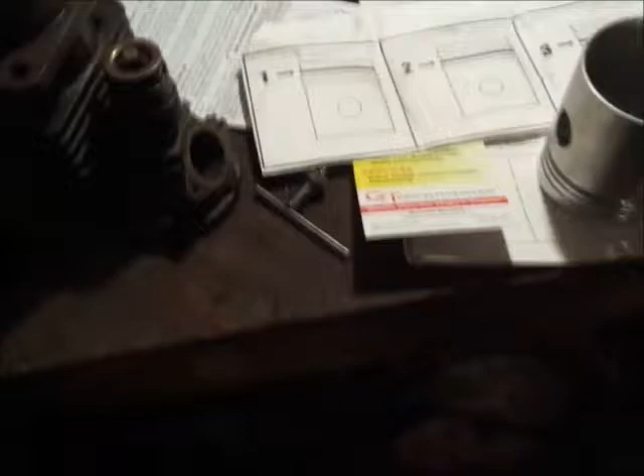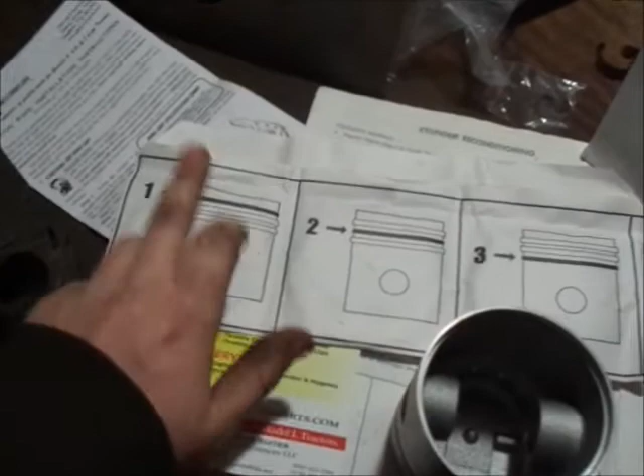One thing I will say here while the heater's running and getting warmed up is GT Gravely Parts really has done good here with showing you the first, second, and third oil ring. They also give you handy dandy instructions on how to gap them and everything here, so if you guys get them, you should be able to follow the instructions pretty easy.

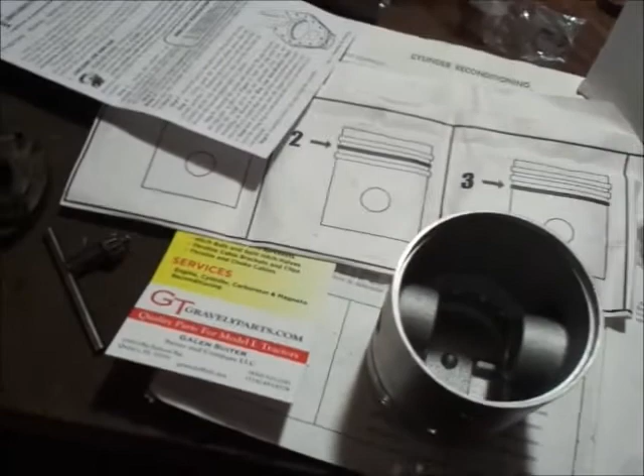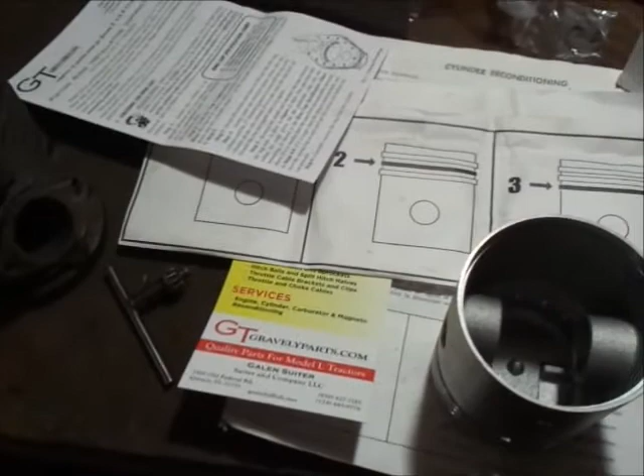I'll show you me putting them in here. I have measured them, and the gaps are all about 4 thousandths out of spec on every single ring above. So what I'm going to do is just slap this 20 over in it, because the 25, I went back and checked it again, and everything on that is way too tight. The piston to skirt clearance is bad. So I'm going to put this in here and run it, and like I said before, what's the worst thing that happens? It smokes. So here we go.

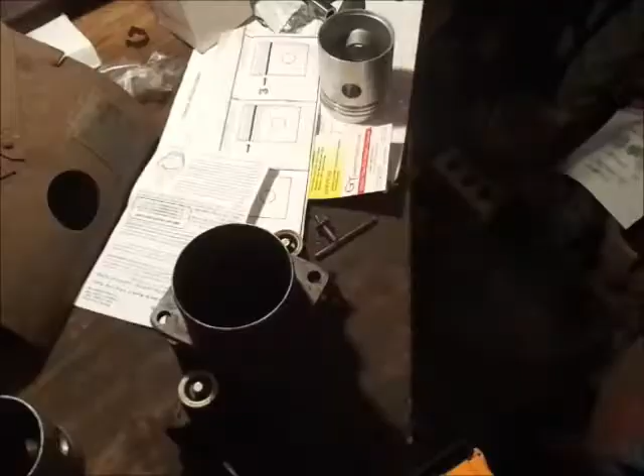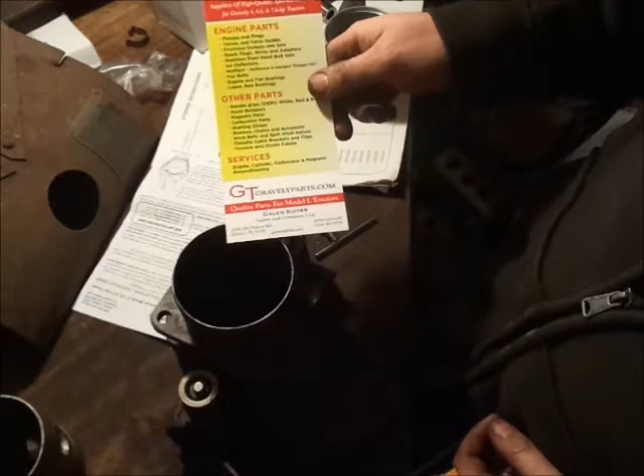Alrighty guys, so we got the piston here and the rings here from GTGravelyParts.com. If you guys are hunting for anything, piston rings, piston, anything along those lines, these are the guys to get it from, and everything you order comes with one of these cards, so remember that.

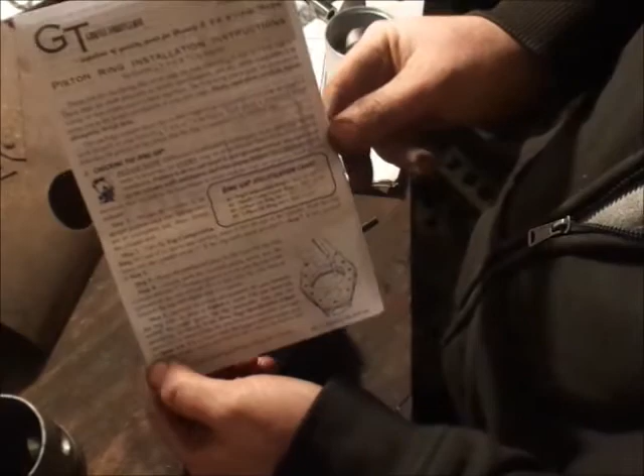So we're going to move into the rings here, which they have supplied the paper and given us all the numbers and everything. I believe I'm in frame. There we go, for sure. Hopefully you guys will be able to read this. I'm trying to read this through the camera, but I don't know if I can.

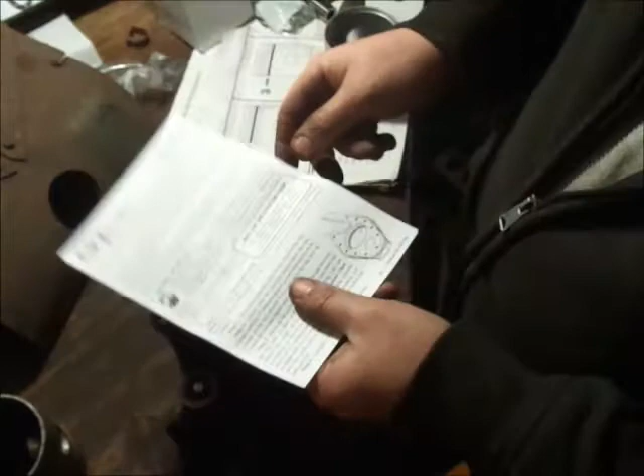Top compression ring should be 12 to 20. Middle compression ring, or second ring, 8 to 16. And the 3-piece oil ring set should be 015 to 55, and the one piece should be 08 to 016.

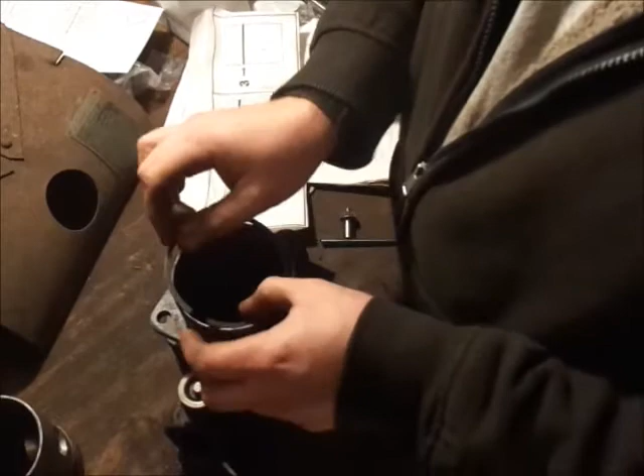So, with all that being said, hopefully you guys saw the clip, whether I'll stick it in the beginning or the end. Let me see if I can get the rings in here. Of course I can't get them to go in when the camera's here, but stick them down in here. I'm pretty sure you guys cannot see this, but I could be wrong.

Basically, I lost my feeler gauge I wanted to have. Here's a 24. As you can see, a 24 thousandths feeler gauge goes in, and it's snug.

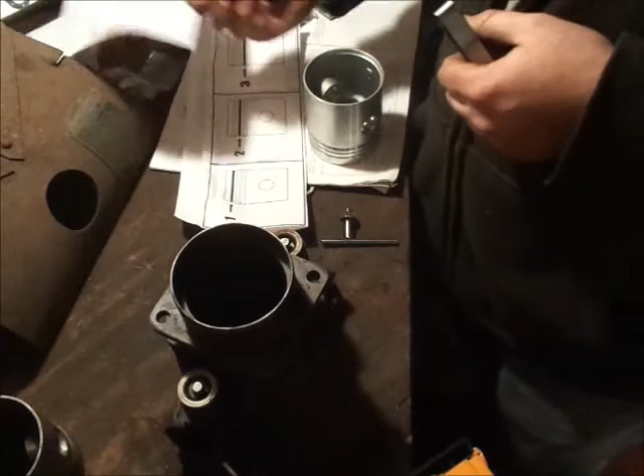So basically, the top ring is out of spec by about 4 thousandths, and with a Gravely engine, most of you guys will know that's nothing. So we're gonna run what we brung, and I've already checked the number 2 and number 3 rings. They all spec out 4 thousandths over.

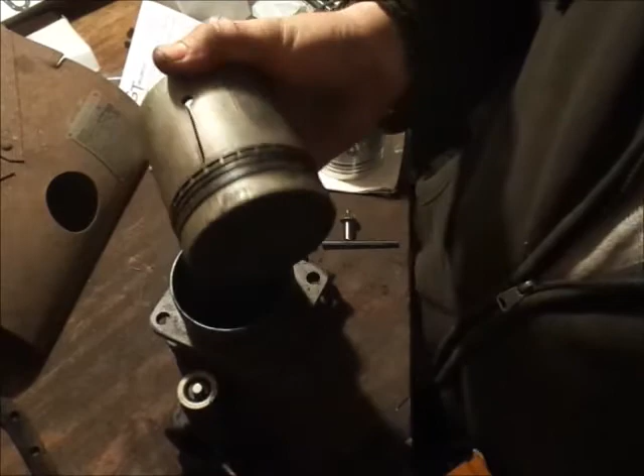What I'm going to show you guys here is that the 20 over piston does have some slop to it, but this 25 over piston won't even go down past that spot, which it's hitting on the oil rings, I know it is.

So I could probably, if I filed this piston down, which this piston is not that good in the first place, make that work. And then I'd have to file the rings down and everything. But for what I'm going to build, which is mainly going to be a show tractor but it's going to get used some, I think we'll be okay.

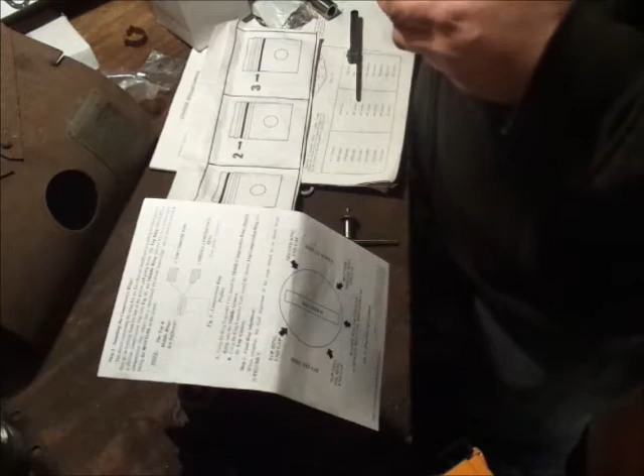So what we're going to do here, I'm going to start by putting the rings on. The other thing you need to note is that you can, in fact, install the rings incorrectly. So the top compression ring is square, so it does not matter which way it goes on. Hopefully I'm in frame here, guys. Yeah, I'm in frame for sure. But I don't have a ring spreader.

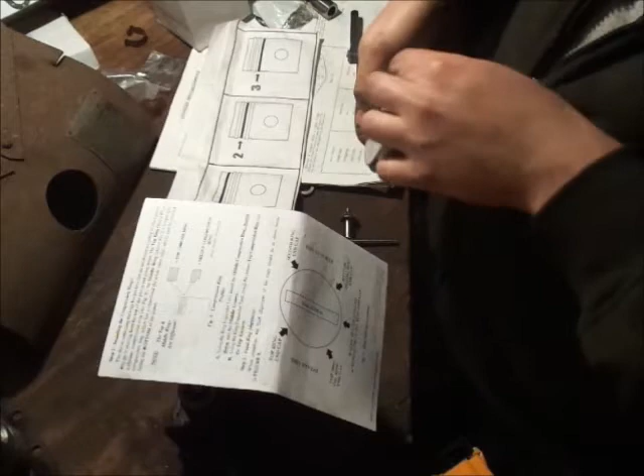So we'll just put these down on here ever so gingerly, because believe me, if you break these, you're screwed, you gotta buy another set. Also, I don't know, hopefully the camera will pick up on that. That's pretty cool.

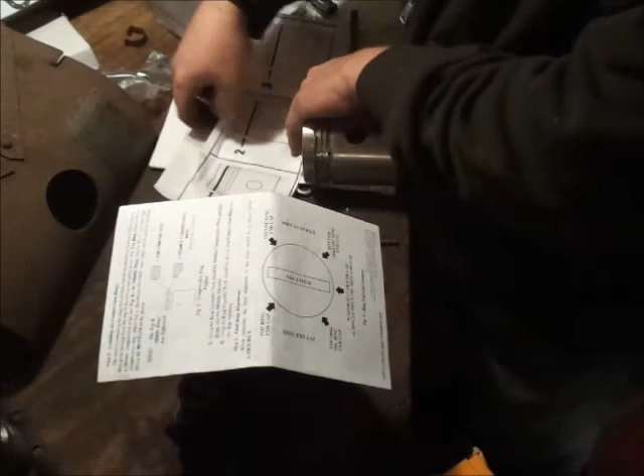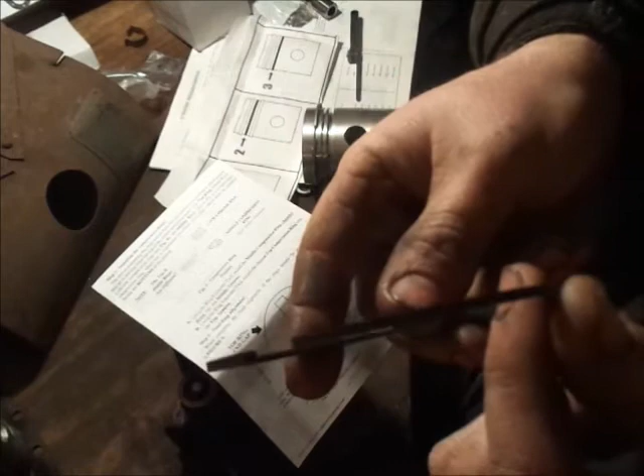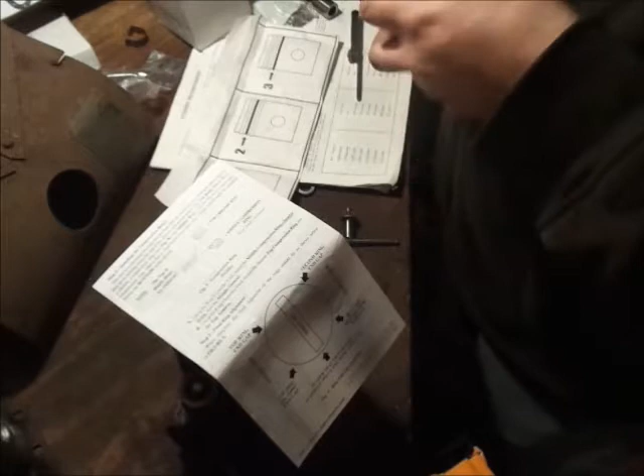Now the middle compression ring, hopefully you guys can see that there, is actually beveled on one side. Whether the camera can pick up on that or not, not 100% sure, but basically the bevel needs to go down. The other thing I'll mention here is, for right now you just want to get them on, and then you can spin the rings where they need to go exactly later. I think I'm actually doing this in reverse order — you should do the oil rings first. Probably didn't do a lick of that in frame hardly.

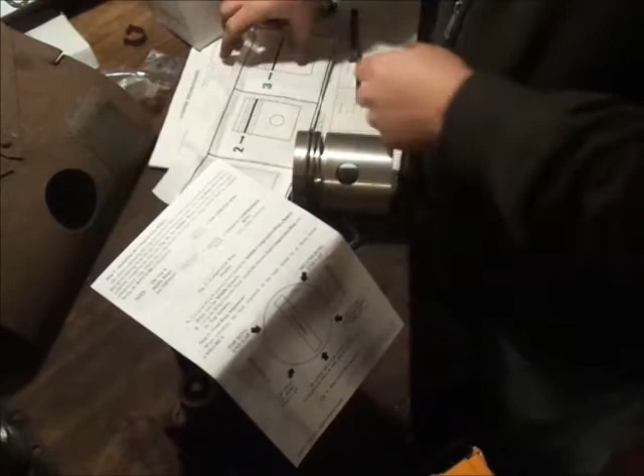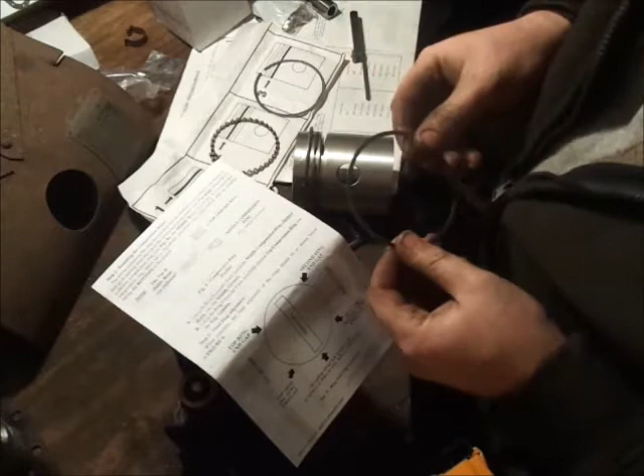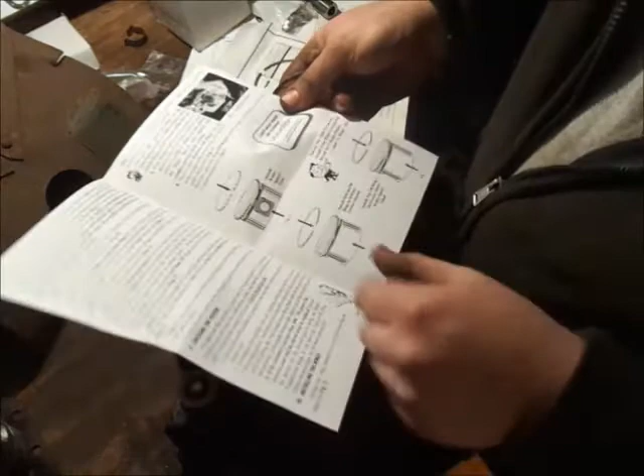And the oil rings, using the ring expander tool, didn't have that. Let's see, does the previous page show the oil rings? Yes, it does.

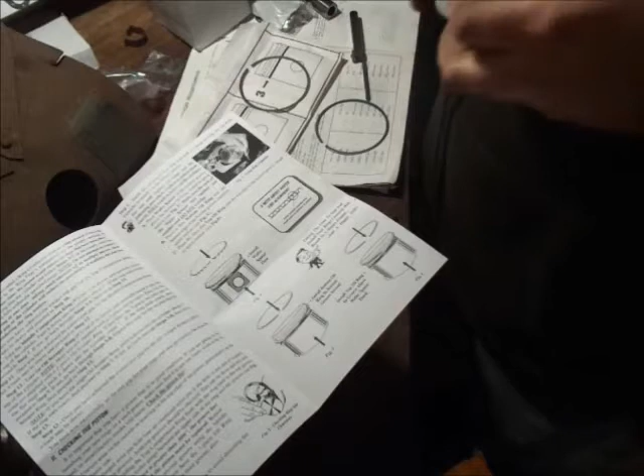Install the wafer first. See, which I would have done the other way, to be honest. Again, I didn't do it on camera, but the wafer ring is very easy to install.

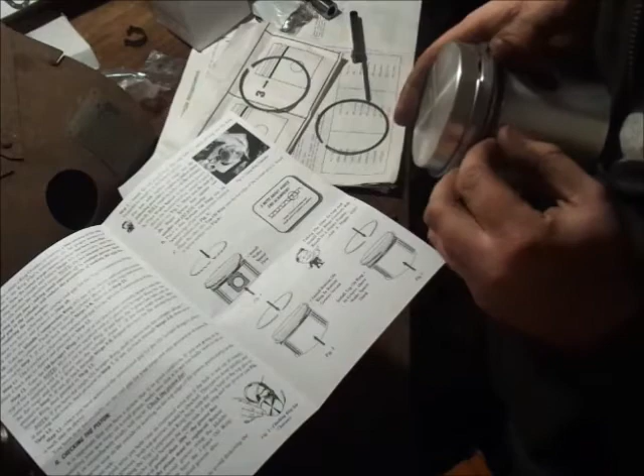Now, if I can, like I said, once you get these in here, then you can line up where all the ring gaps are and everything.

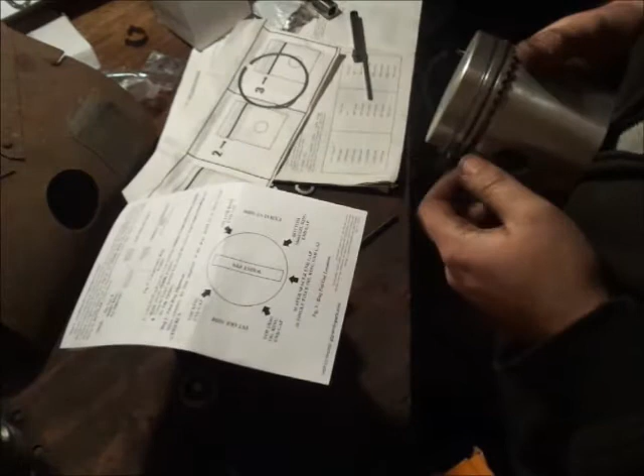Which I can start looking at now, because the oil rings are not very easy to spin. Bottom thin oil ring, wrist pin.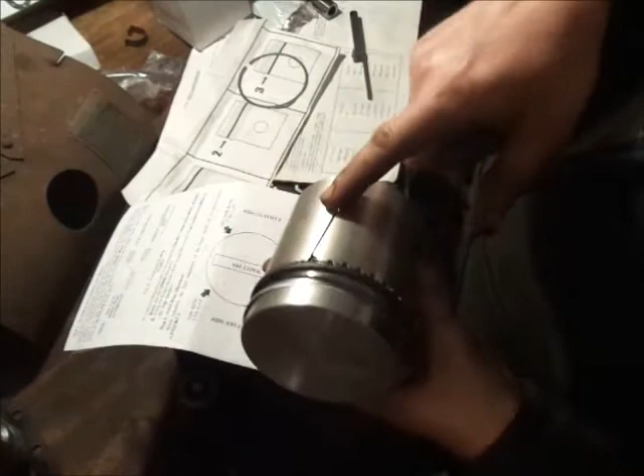Okay, this expansion slot right here goes towards the exhaust side. I am pretty sure of that, if I remember correctly. Well, unless I'm wrong. Maybe I better read again, I'm getting old.

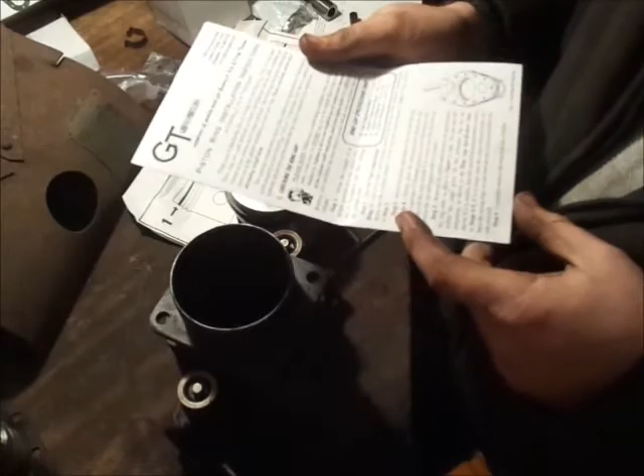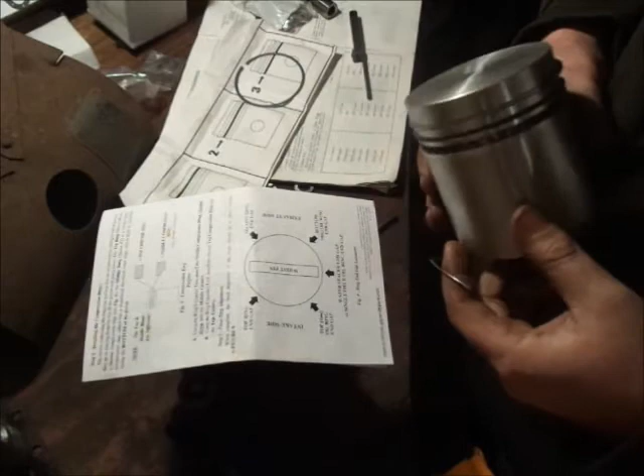Yep, it does say install the oil rings first, so I did do that backwards. It's amazing, they don't reference the expansion slot in the piston. You would think that goes towards the exhaust side, but on the old piston I have it on the intake side.

Hold on a minute, guys.

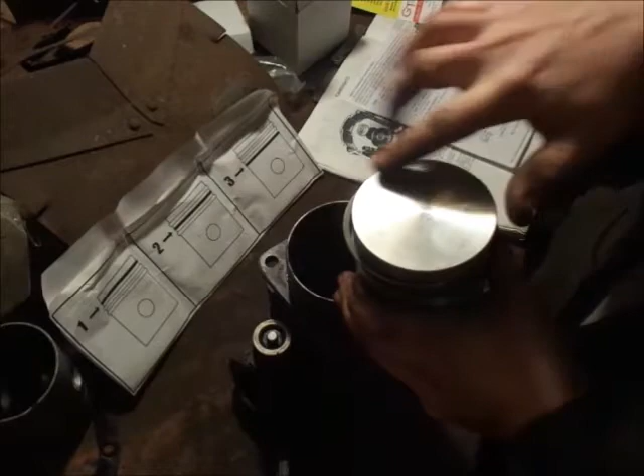Alright guys, I actually went in the house and double checked something. I wanted to make sure, but the expansion slot does go towards the exhaust side. That is dictated - a lot of the original pistons had a notch in it, and the notch would face towards the rear of the tractor, which was actually the front of the engine. Obviously this one doesn't have the notch, and what was confusing me is the piston's actually in backwards on this tractor, which I didn't catch until now.

So the next step is, I'm going to dictate where your ring gaps end. So the bottom oil ring you want between the expansion slot and wrist pin. You want the wafer right at the wrist pin in the rear. And you want the top oil ring to the left of the wrist pin.

And the second ring, they want it spun over here in front of the expansion slot and in between the wrist pin, roughly about halfway. The one thing you gotta realize is these will spin a little bit when the machine's running. And the top ring needs to be the whole way on the intake side.

I went 180 around, roughly about there. And the top oil ring is lining up with it, so we'll go right about there in the front. So, in general, the piston will go in that way.

Now I'm gonna go get some oil, and I'm gonna put this on the rings and cylinder, and we'll get them started down on the bench here.

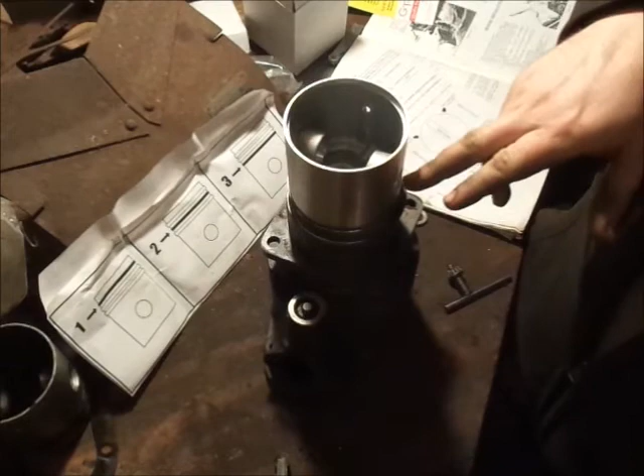And the easiest way I have found is you put - let's see, you want to put the clip towards the front of the tractor in and start the wrist pin in the back. I found it's easier to drive in from the back.

So hold on a minute here. Okay, so what I'm going to do is I'm just going to take my finger with some oil on it and run around the rings here.

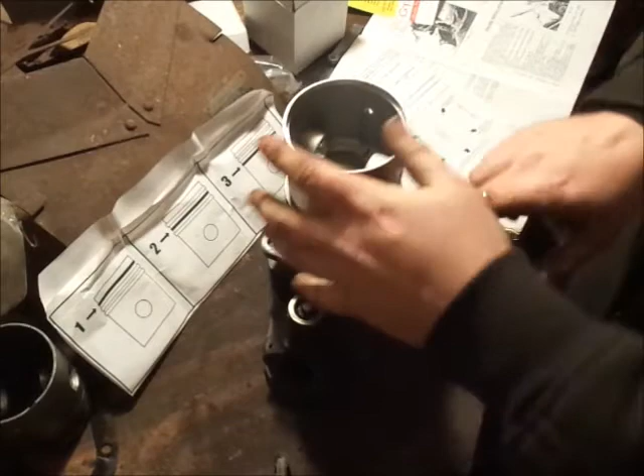Then at that point, we'll be good to start the piston down in. And I'm going to put a little bit more on the cylinder and in the top when I'm ready here.

So, you might have to get 2 screwdrivers and push the rings together, 2 right here.

Hopefully you guys are in frame yet. Yes. Can't see a thing because you're on the dark side of the moon here.

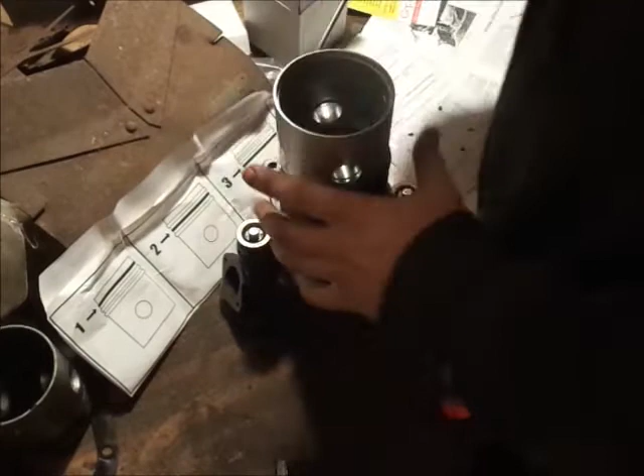Be fun to get these started. There we go. Kind of gotta...

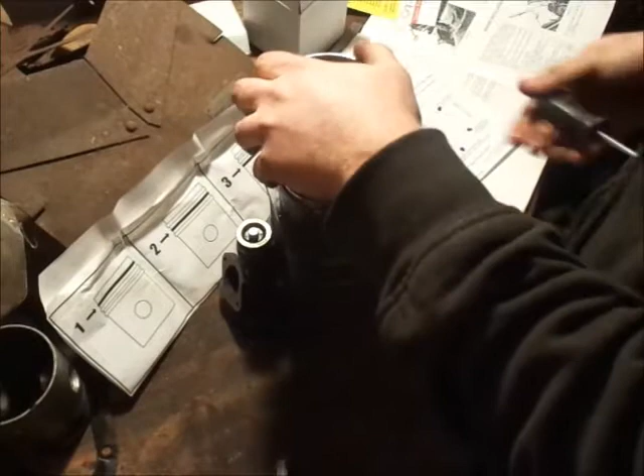Force down on the piston at the same time you get the rings pushed into place. And of course, with the camera going, they want to be a pain in my you-know-what.

Aha! There we go. Okay, got the first ring started. Same thing here.

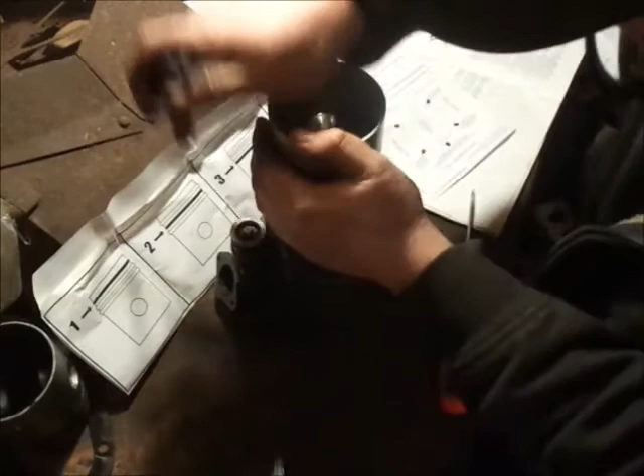This would be real easy to do if you had the right tools to do it. The nice thing is with these, they were kind of engineered to be worked on without having a machine shop. And normally the oil rings are the most fragile and can be the most pain to get started without breaking. So you want to be real careful with them.

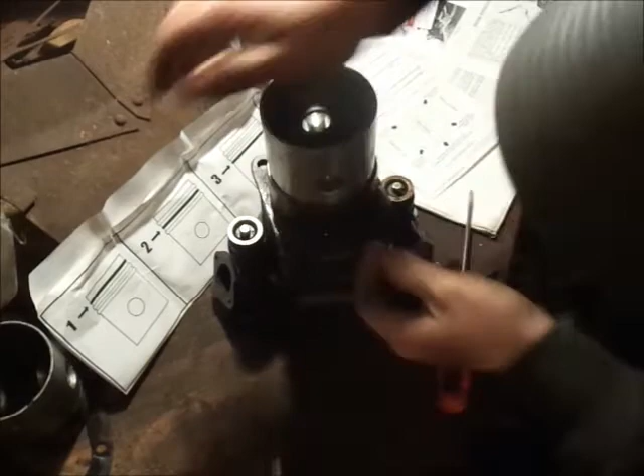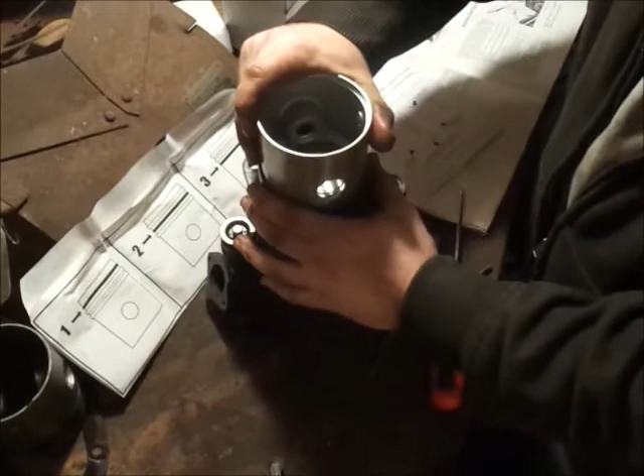Okay, now we'll get that started down in there. And now is definitely a good place to stop.

And next session here we'll get the cylinder cleaned up really good. And I'm going to decide what I'm going to do here because I need to weld a stud on this, and it might be easier to do that on the bench than it is in the machine. And we'll take the old piston off, get the silicone off the cylinder, get the gasket set out, and we'll start with that. So thanks for watching, guys, and we'll see everybody later.

And just for making me look good, since I didn't show putting the piston rings on because I put them on in reverse order. So later, guys.